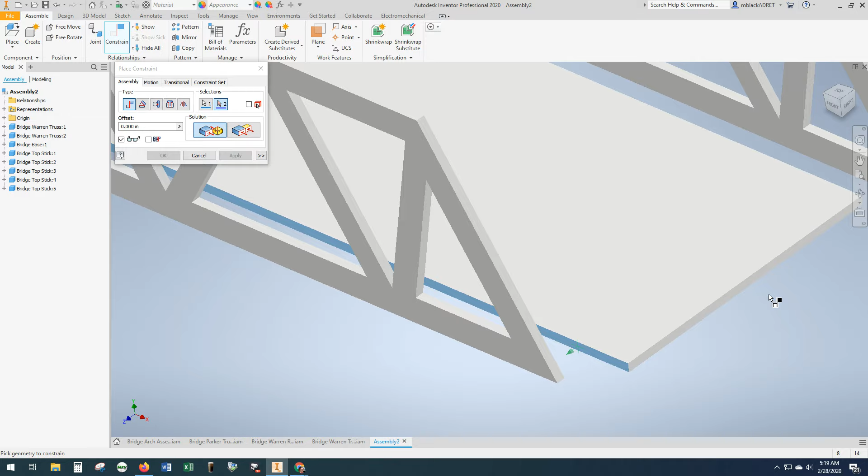So I want to stay on the mate tool, and I'm going to mate this outside part of the truss base, and I'm going to kind of zoom out here and turn to get the inside of the truss like that. And you can hear it constrain, hit apply. And then I'm going to switch over to the flush tool. Okay, so that's going to take surfaces and make them basically flush with each other.

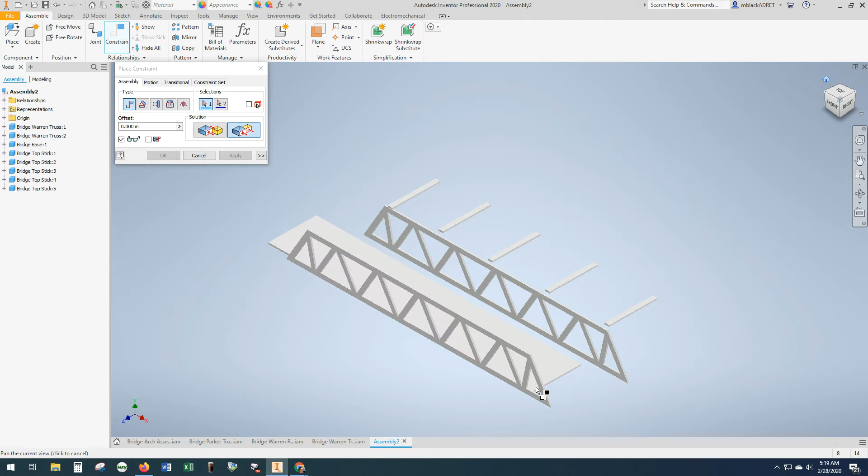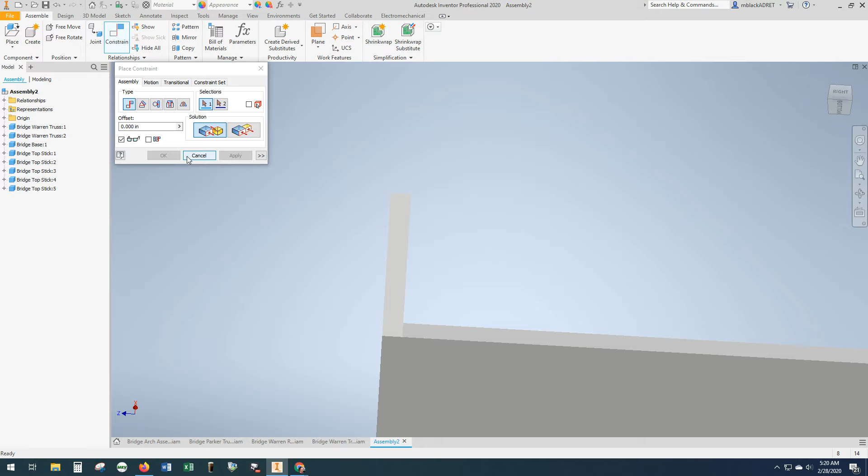So I'm going to turn down here to the bottom of the truss, and I'm going to choose these two bottom surfaces, hit apply. Then one more constraint I want to make is back to the mate tool, and I want to constrain here with this outside edge. Okay, hit apply and cancel, and let's go back to isometric. You can see our first truss is done.

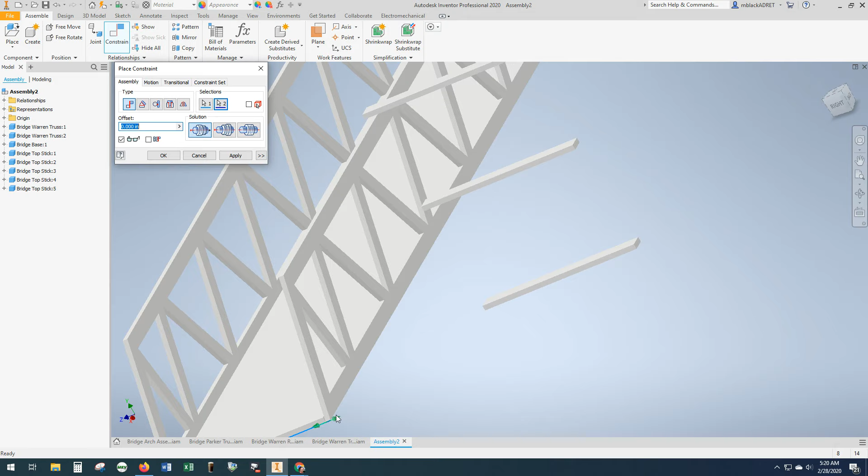So let's do the second truss. So constrain, and I'm going to hit the inside of that truss, turn a little bit, zoom in, and hit the inside of that base, hit apply. I'm going to go ahead and stay on the mate and hit these edges, hit apply, and then I'm going to turn underneath and do a flush constraint with this and this. Okay, doesn't look like it did anything, but it did.

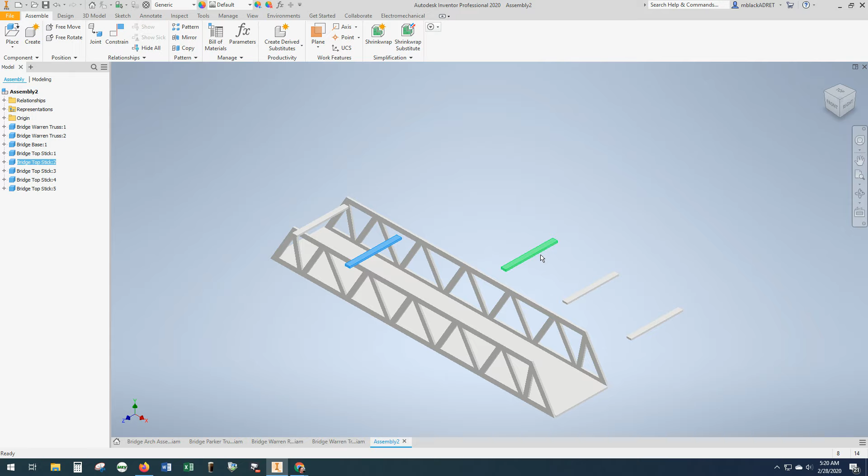Okay, so back to isometric view, and let's get these top pieces put in place. So I'm going to just kind of put them about where I want them. I want to be able to see the ends of them. And I think for now I'll just do 3 of them. You'll probably do more. You may even do some diagonally. But let's get these constraints.

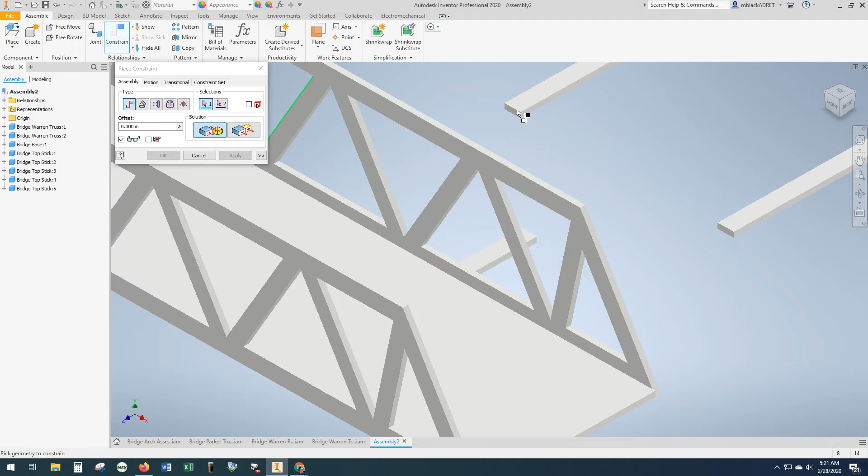So let's move in, and we're going to take the top edge of that and the top edge of this, hit apply, and then let's move down, and let's get the next one, top edge, apply, and then you can see it's down there, but that'll fix when we constrain it. So top edge, hit OK.

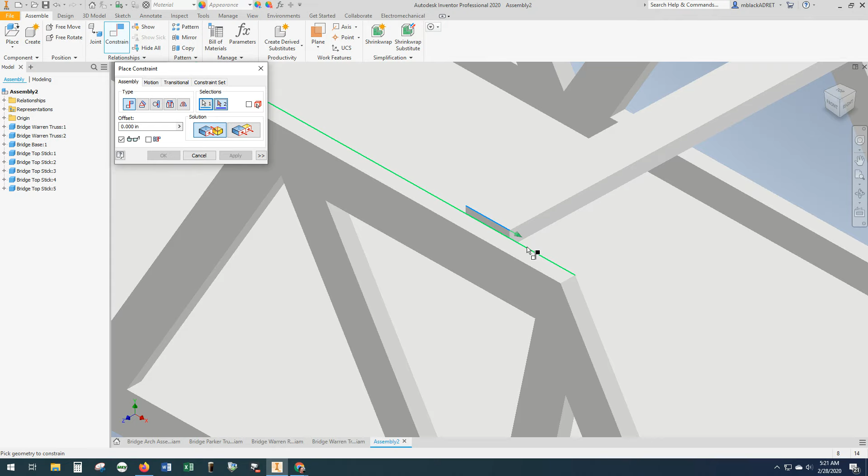All right, so let's go and tip these up a little bit. So I'm not constraining them right now. I'm just moving my mouse and I'm tipping them up just so I can see the edges, and that'll make constraining a lot easier. Okay, so let's constrain top edge with top edge, apply, top edge, apply, move, and let's zoom in a little. Top edge, apply. And then I'm going to constrain these outside ones as well.

So I'm going to click this edge with this edge that pops it to the outside, hit apply. I'm going to move my truss down and do this side too. I'm going to do top edge, and OK. All right, so the middle one, because there's really not much to constrain it to, I'm just going to move it about where it goes.

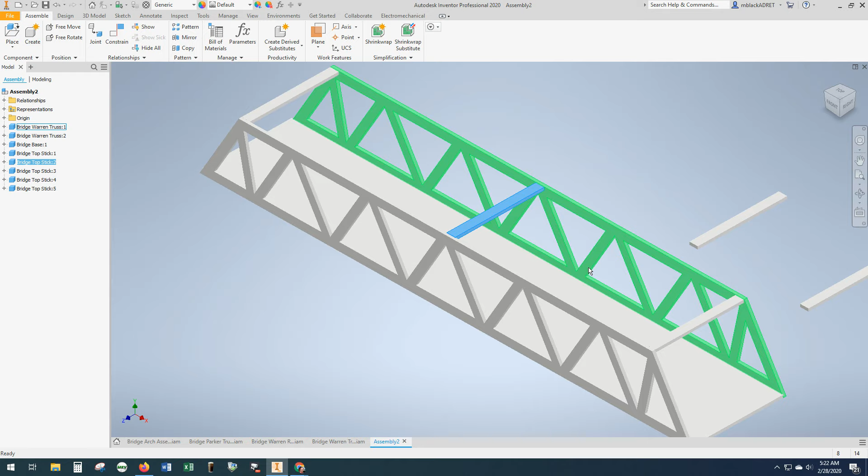And you can do these last 2 in the middle here. You can do more. You can do crisscross. I'm good with what I have there. This all depends on your design. So I can click on each of those and delete it and go to my isometric view, and you can see we have a nice finished assembly that's ready to pop into our drawing page in the next video.

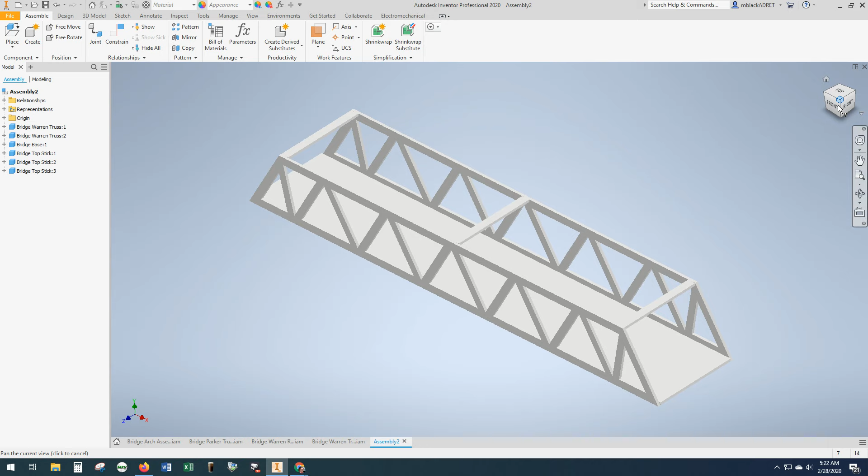And it's really not that hard to do, but take your time with it. Move the mouse around, orient it so that you can get better views of constraints, and then zoom in to get the constraints done. And that is it. So save it into the proper folder and move on to the drawing stage.